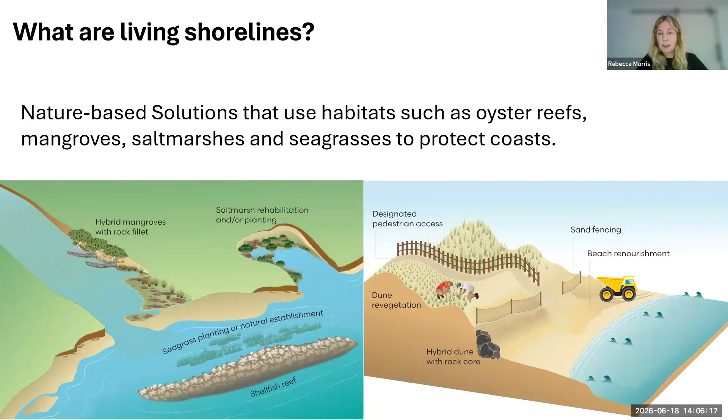So I guess to date, nature-based solutions for coastal resilience have been used more outside of ports, and they're often called living shorelines. Living shorelines are nature-based solutions that use or restore habitats such as oyster or coral reefs, mangroves, salt marshes, seagrasses, beaches, and dunes to protect our shorelines.

And living shorelines are nature-led approaches. So they can be soft, and this is when you just restore the habitat by itself, or they can be hybrid, where there is some engineered component, but the point of these structures is to support the establishment of the ecosystem or enhance resilience. So importantly, the structures become less important over time in providing the functions, and the shoreline protection comes from those natural ecosystems that grow and develop and become self-sustaining.

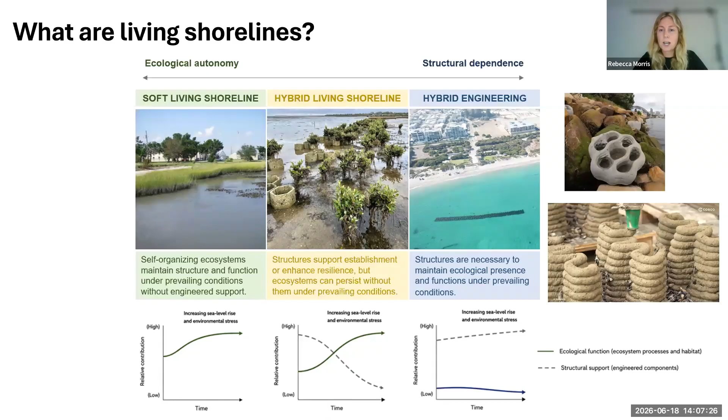Another type of engineering is hybrid engineering, where you may integrate some of these ecosystems, but these are more structure-led approaches. So the structure often has to remain in place as the primary protection part. And of course, beyond this, we can also look at ecological enhancement of traditional infrastructure, which I have worked on in the past, but I'm not going to focus on today.

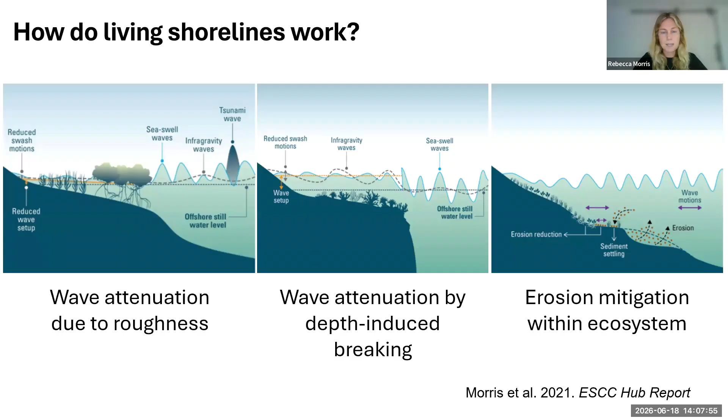So how do living shorelines work? They introduce this large-scale roughness into our coastal zone, which attenuates wave energy through drag. It also decreases the depth, so you get wave attenuation through breaking, and due to reduction in hydrodynamic energy, you get sediment accumulation, but also some of these habitats have these lovely, complex root systems that stabilize sediment.

And why would we want to use living shorelines? Not only are they great shoreline protectors, but they also provide a number of co-benefits like food and shelter to increase biodiversity and fisheries productivity. They can filter water, so improve water quality. We have our blue carbon ecosystems there, like mangroves, salt marshes, seagrasses.

And they're also adaptive to changes in climate. So oyster reefs can accrete at the rate of sea level rise. Mangroves have been shown to be able to do the same. But despite the benefits of these nature-based solutions, they're not really used as standard practice everywhere.

And through our engagement with our practitioners in Australia, one of the reasons for this is just a technical understanding: what living shorelines can we use, where, when. And so in response to that, we wrote these guidelines. Within these Australian guidelines for nature-based methods, there are some chapters that are quite Australia-specific, like the policy landscape.

But there's also a chapter on every single ecosystem that would be relevant beyond the Australian context, and it details the physical and ecological considerations for using these nature-based solutions and for optimizing the ecological and engineering outcomes of living shorelines, but also other things that you need to consider: navigation, safety, approvals, governance, and other socio-cultural values at the site as well.

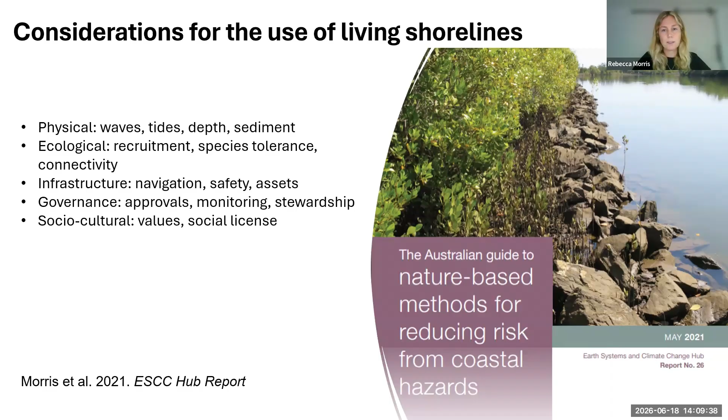And to finish, in the second half of my presentation, I just wanted to give some examples that I've worked on that might be relevant to the port environment. This photo here is from eroding estuaries in New South Wales in Australia. The traditional approach to protecting these eroding estuarine shorelines would be a sloped rock revetment that goes all the way up the estuary bank, and that would then take up the habitat for mangroves, so mangroves couldn't live on a revetted shoreline.

But instead, this approach is called rock fillets, and it's really similar to rock sills in the United States, where you place a rock structure on a shallow bank platform, leaving some space for mangroves to establish behind these structures. And then the mangroves provide increased coastal protection through time.

And so in systems where you have good recruitment of mangroves, like in the New South Wales estuaries, there are a number of mangrove forests there. On eroding shorelines, you get mangroves recruiting, but because the mangroves can't grow their roots fast enough to maintain themselves, they don't survive past a few months.

But once you put in these rock fillet structures, you can see they start to stabilize the bank. You get sediment accumulation, and then you get this recruitment of mangroves behind them. And our research showed that within 10 to 15 years, you get above-ground biomass in these hybrid structures that matches natural fringing mangrove forests.

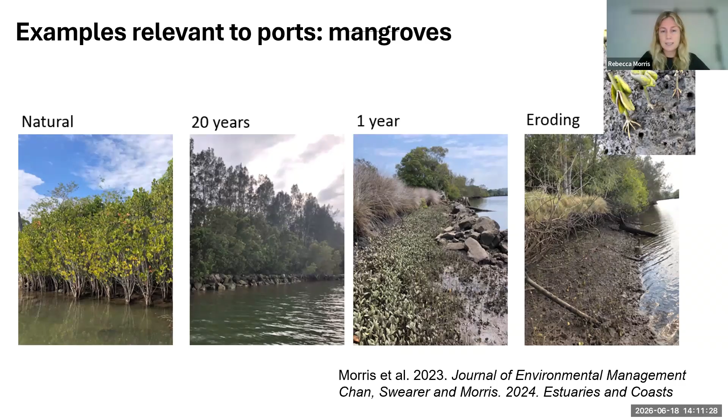So the second example that I wanted to talk about are these reef-based infrastructure for reef building species like oysters, or you could also think of corals as well. And so this picture here was actually developed with the Department of Defense in the United States. And so this is at an Air Force base in Florida. And this particular reef was specifically designed for oysters.

And you can see, offshore we have these kind of oyster reef patch structures, and then inshore these kind of U-shaped structures are actually to support the development of seagrass, and then the ones even further in the intertidal salt marsh. And so this is to develop a living shoreline mosaic, because we know that when you get multiple habitats together, you have a more resilient coastline.

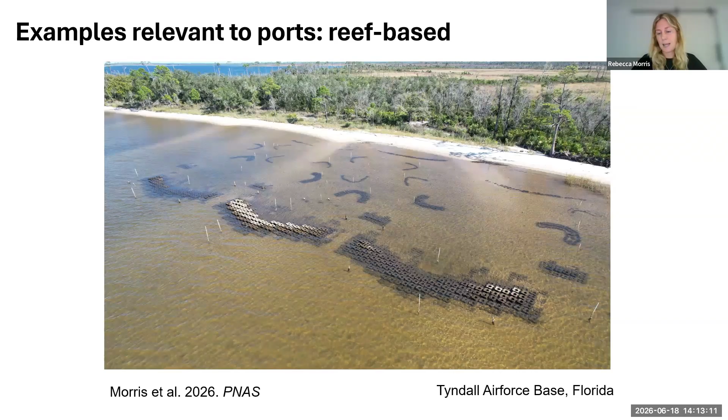It's more effective for coastal protection, because even when water levels are elevated during a storm, the salt marsh can do more of the work, whereas if the water levels are lower, then the oyster reef might do more of the wave breaking. And also for biodiversity, some organisms need salt marsh and reefs at different stages of their life. And so you need these complex mosaic habitats to increase biodiversity as well.

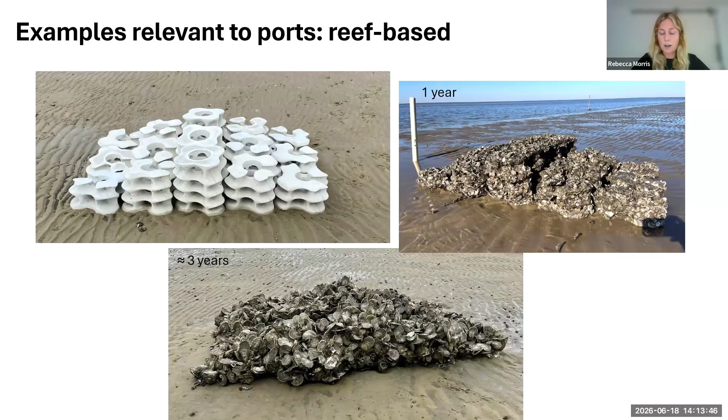And so this particular module has lots of surface area for oysters to develop on. When it's not colonized by oysters, it increases drag as the water passes through the holes. But once the oysters colonize it, obviously you lose that porosity, but it becomes a more rough surface. And so the wave breaking is actually more energetic over these structures. And so you actually get better wave attenuation on lower water levels when you have these oysters colonizing the structure.

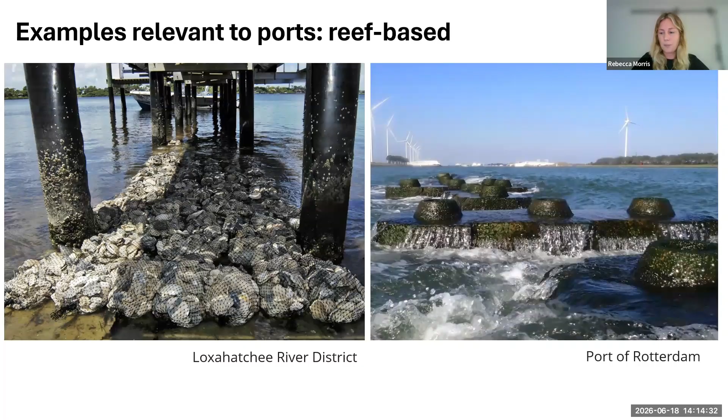And I couldn't find any examples of oysters directly in ports, but you can see how you might be able to, for example, integrate modules into the toe of breakwater structures, or in front of breakwaters, or around other infrastructure in ports. That would potentially, I guess, increase the coastal protection of those structures, or reduce the maintenance of those structures. So I think there's probably a few different ways that reefs might be applicable in some areas where you have these reef building species.

So to finish off, really, it's just to leave you with what a future port shoreline could look like. And it's really about designing ports using a spectrum of approaches. So obviously we're still going to have hard infrastructure in ports, and these could maybe be ecologically enhanced, but potentially we can have this spectrum of approaches as we move out from the hard infrastructure, and coupling, say, reefs with infrastructure, where nature really becomes part of the system, not just an add-on at the end.

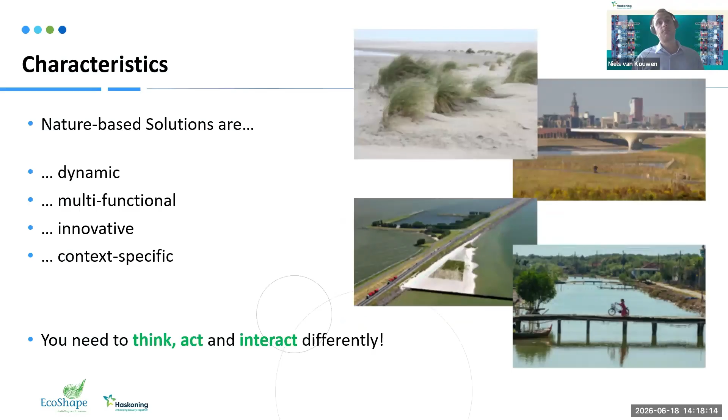So, for example, that has been done already quite a bit in coastal protection, but also, for example, in urban environments. A lot has been experimented with it. But in port environments, that turns out to be still quite difficult. So that's something we wanted to focus on. And it really requires a different way of thinking. And that's what we at EcoShape really want to do.

So EcoShape is a consortium of mainly Netherlands-based companies, such as contractors, consultants, working all over the world, specializing in hydraulic engineering. And we partnered up together with the World Bank to create this guideline. I'll really go quickly through the slides, but I believe they're shared afterwards, so there's more information in there. And you can also always look at the guideline online if you're interested in more information.

So, as I said, ports really have a massive impact on the environment. And it could be the natural environment, so they do have an impact on how nature develops, but also they change how natural processes behave around the port. But they also have an impact on the social environment, which is both positive and negative. They create a lot of jobs, of course, but there are also conflicts with the city and coastal squeeze sometimes. The other way around, that's of course also true.

So natural processes also require constant maintenance within the port and a lot of additional infrastructure, but also climate change really requires us to rethink port infrastructure. And then again, we have a lot of social elements that really also have a massive impact on how a port performs. And we call this the license to operate. And that's one of the important motivations for ports to really consider looking further into nature-based solutions.

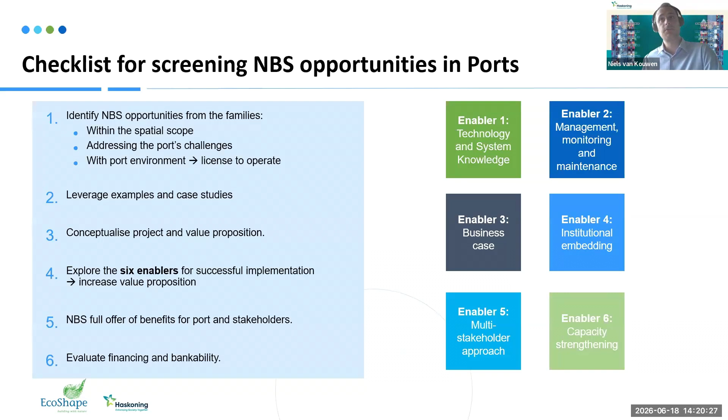So what we did with the World Bank is to look at a checklist that you can do when you're considering a port infrastructure development. And by going through this checklist, you can evaluate if there are really opportunities to embed nature-based solutions within your planned improvements. And rather than going through it, I would like to go through it through a hypothetical case, let's say in Southeast Asia. So I have this really hypothetical port and this hypothetical terminal.

And I'm really concerned about this terminal because of climate change. I see risks related to sea level rise and increased storm intensity. And what are those risks? Well, first of all, there can be wave overtopping, which will increase the downtime at my terminal, but I also foresee more wave penetration at my berth, which lowers, of course, the productivity of my quay and my cranes. Some other things I have to consider is that I have a limited budget, but I'm also working on really weak, muddy soils here, and I have also other stakeholders which have activities in this area.

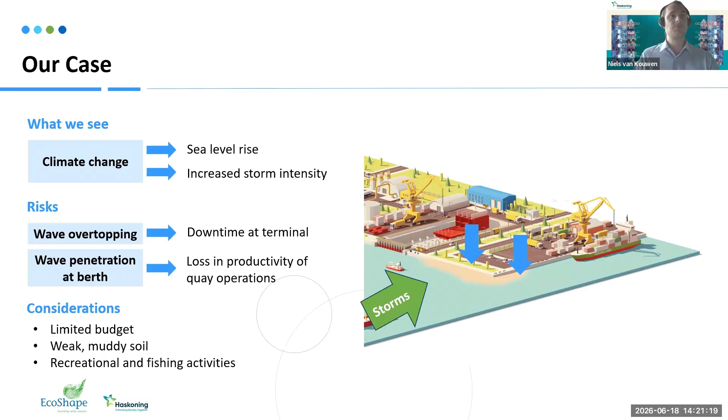So the first step in our checklist is really to evaluate what challenges I need to address. And these challenges can be a really wide range where nature-based solutions could help you. So they could be, for example, related to development and expansion. So looking at, for example, CAPEX or operational expenditures, but also looking at permitting or making more use of available space. It can be climate risk related. So think, for example, of storms, typhoons, flooding, sea level rise, etc.

But a large element is also performance and efficiency related. The performance of ports is really related to, for example, wave penetration and wave-related downtime, but also navigation performance. Then we have a category which is related to how you maintain your infrastructure, and it can be both soft infrastructure and hard infrastructure. And the last category is really related to that license to operate. How do we deal with the social environment as well, and how do we incorporate them in how we operate as a port? Well, for our case, it's mainly related to climate risks, but also downtime-related risk, wave-induced downtime.

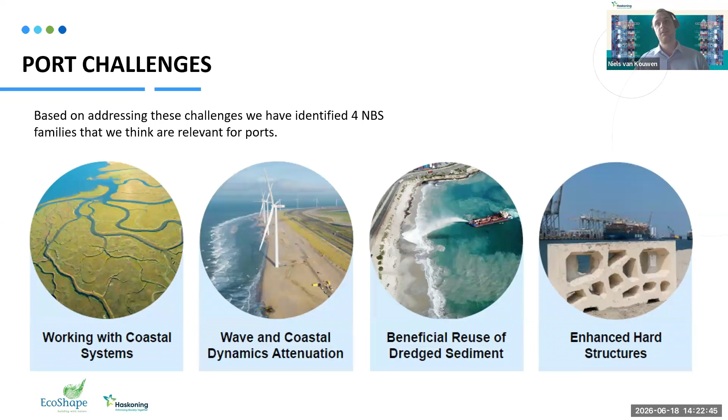If we have identified the challenges that we would like to address, we can consider 4 families. We have divided port-related nature-based solutions into 4 families. The first family is working with coastal systems, so that really relates to what opportunities reside in working with the natural processes around my port. And these nature-based solutions really focus on a system level.

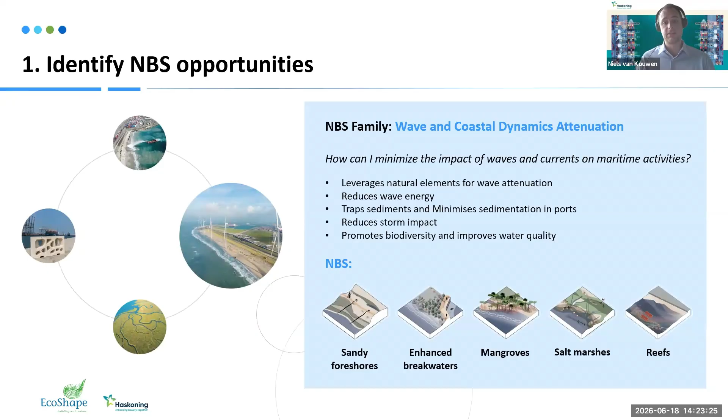Then we have what Rebecca already mentioned, the wave and coastal dynamics attenuation family. So that really relates to how can I minimize the impact of waves and currents on my maritime activities. And there are many ecosystems that are really well placed to do this. Then the family beneficial reuse of dredged sediment. Many ports have necessary dredging activities they have to do. And this family really relates to, okay, what other opportunities do I see to make better use of my dredging activities?

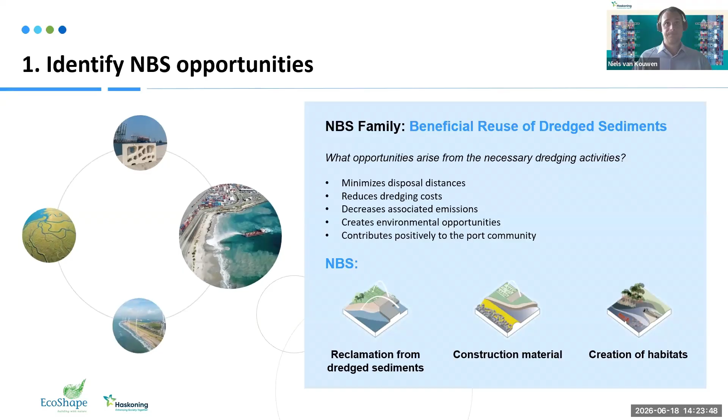And the final family is related to enhancing hard structures. So that's mainly related to how can I make my hard infrastructure, my quay walls, my breakwaters more environmentally friendly. So there could be, for example, panels or elements connected or embedded within quay walls or revetments or breakwaters. They can be connected to piled structures, for example.

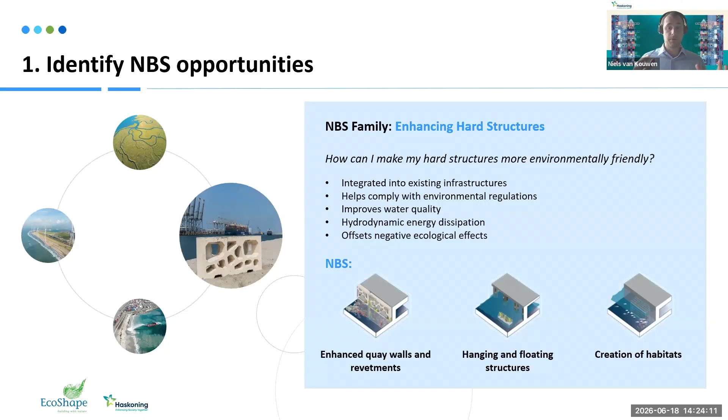Well, if we look at that case I highlighted, then the waves and coastal dynamics attenuation seems really suitable, right? Because it performs relatively well on minimizing wave-induced downtime. It also mitigates storm damage, and some ecosystems can also grow with sea level rise, so there might also be something there.

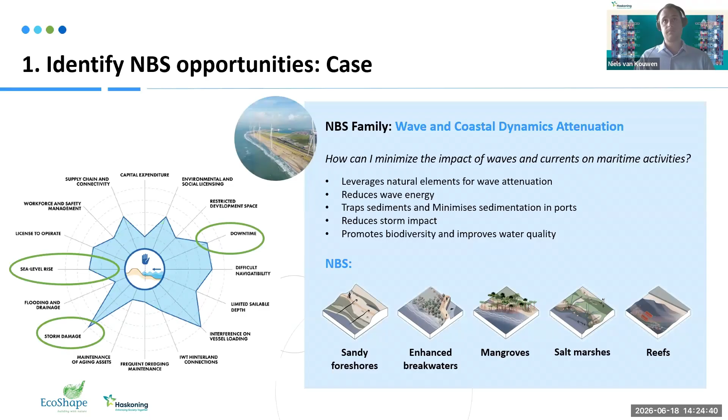The next step is really looking at, okay, what other case studies can I find across the world that really relate to my case, and what can I learn from that? So, for example, in a Southeast Asia environment, we can look at reefs and mangroves. And I have this example of reefs in Rotterdam, but there's also this example of a mangrove breakwater in Jakarta. And that seems really interesting because it's really a similar case to my hypothetical case, luckily.

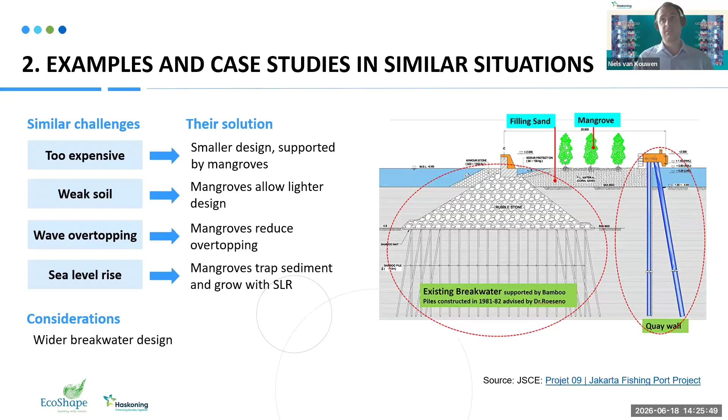So what happened here is a small breakwater needed to be constructed, but it was quite difficult due to the weak soil conditions. So what they did is they reduced the overtopping criterion of the breakwater by using a strip of mangroves to mitigate that wave overtopping. And because of that, the breakwater could be smaller, you need less foundations, and it really resulted in a less expensive breakwater.

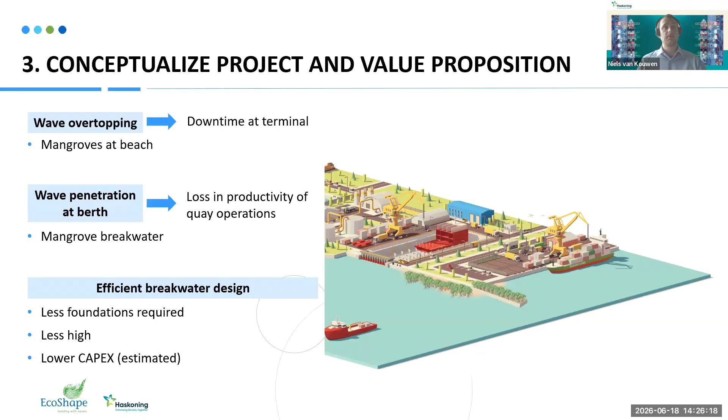So I've chosen to do something similar here, a stretch of mangroves in front of my terminal to reduce wave overtopping and downtime of my terminal itself, and also this mangrove breakwater to reduce wave penetration. And I think because of this, the capital expenditures are also a little bit more limited because I don't need to build a full-fledged breakwater, but I can make it a little bit smaller.

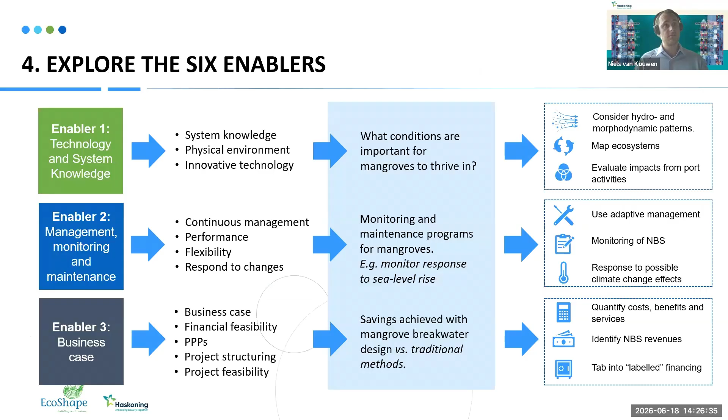The next step is to go through the 6 enablers, which are related to system knowledge. So how am I embedding this in the system? How do I maintain and monitor it during the lifetime? How can I make a good business case out of it? How can I embed it into policy and governance? How can I incorporate more stakeholders? And also, how can I strengthen the capacity? So the support from local communities up to board level.

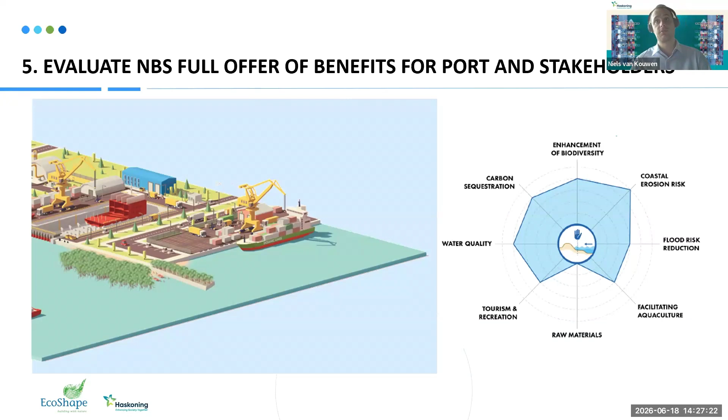And by doing this, you probably need to fine-tune the concept, for example, making the mangroves wider, incorporating more functionalities for other stakeholders. And when you've done this, you can evaluate the full range of benefits, not only for the port, but for a wider range, also looking at biodiversity, carbon sequestration, etc. And when you've done this, it's easier to evaluate a full business case and see if it's feasible. So really at a high level, I think that was what I wanted to show.

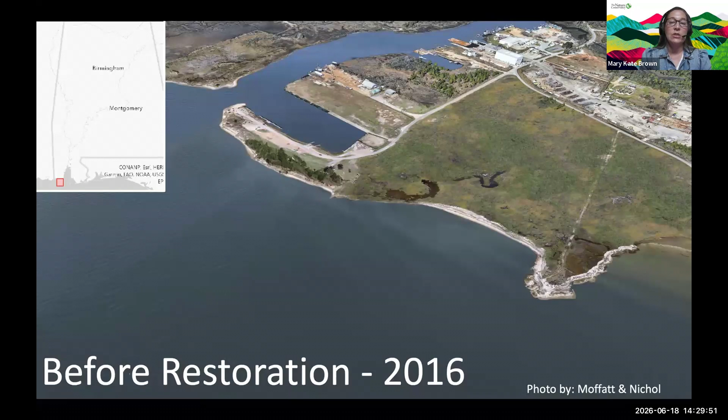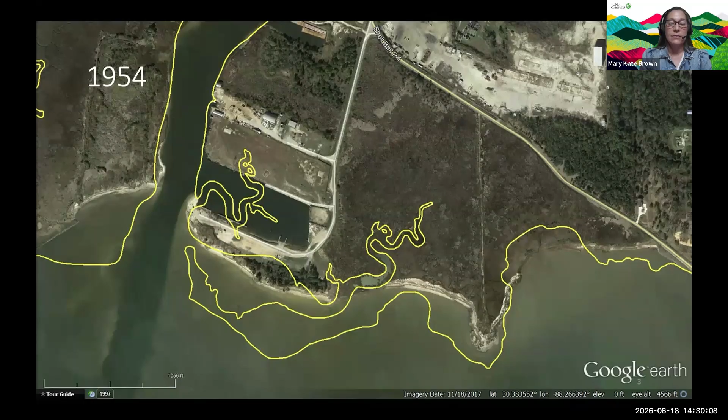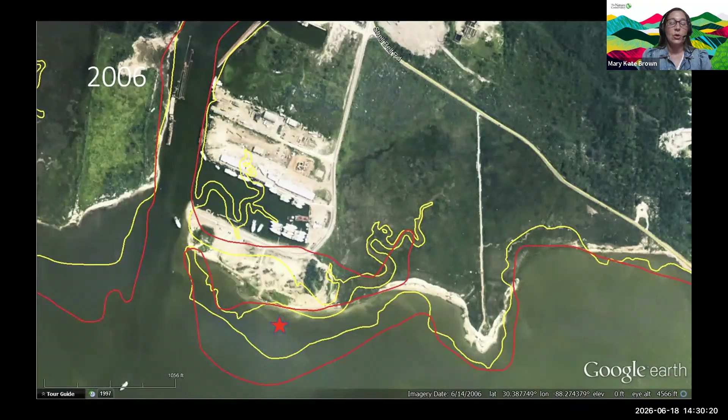If you see the next slide, it will show you the shoreline erosion since 1954, with the red line showing how the shoreline was before. Over the years, the shoreline slowly eroded. In 1997, you will see that they actually built out Lightning Point where the red star is. Then over the next 30 years, the shoreline eroded another almost 200 feet. So this really called for action, that we need to incorporate some nature-based solution.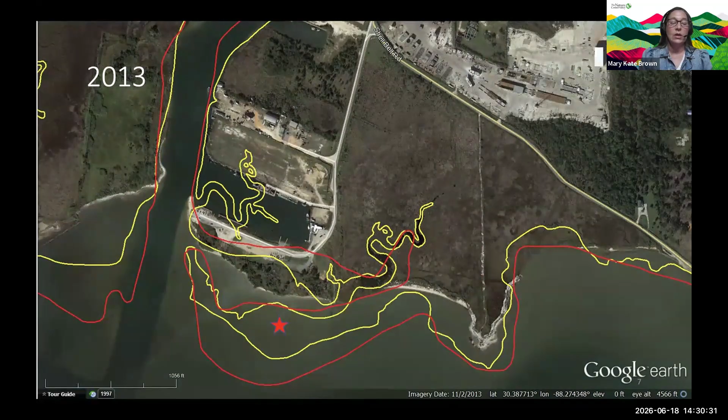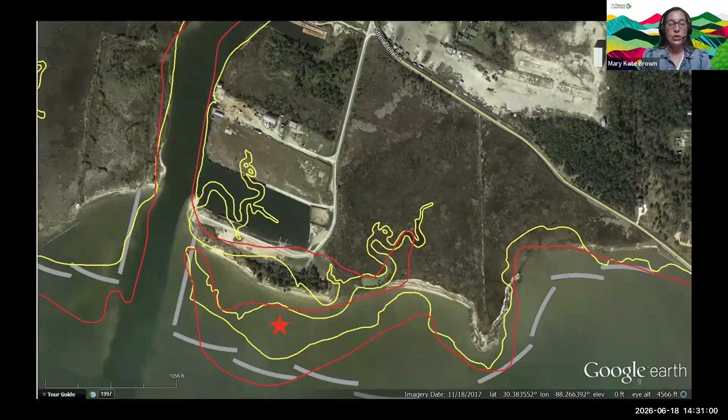So we hired Moffatt and Nichol to come up with a solution with breakwaters, which is the next slide. In 2017, we hired an engineering firm to think about how do we protect this small port but also keep an active federal navigation channel, which you can see in the dark area. They did not previously have jetties in that area, so we were encouraging the Army Corps of Engineers to allow a project with jetties, a type of hard infrastructure, but also mixed with nature-based elements, coastal marsh and beneficial use of dredged material.

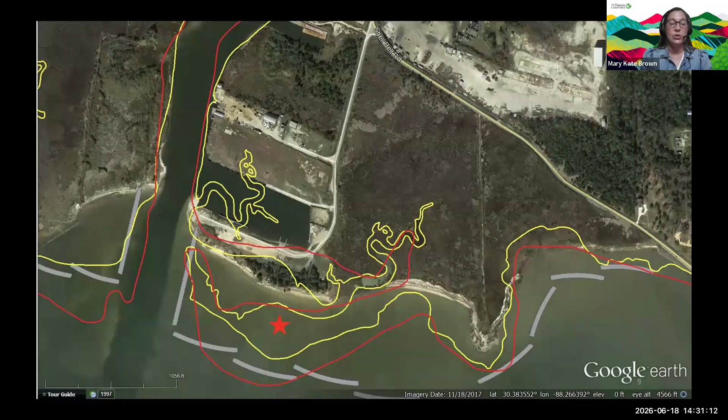So we moved forward with this project with five different components. This is a rendering that Moffatt and Nichol did of what the project would look like 5 years from now. In this rendering, we have shoreline protection, which is 1.5 miles of rock breakwaters. Number 2 is habitat creation, created using the dredged material. We created over 40 acres of coastal marsh, scrub, and tidal creek.

We also wanted to enhance the public access. Really, this is the gateway to the bayou. This is where a lot of people come down to fish, not just to take the boat out, but actually fish for food. And the last, 4 and 5, are really focused on the beneficial use of dredged material: using locally sourced sediment, protecting the active navigation channel, and using the sediment to protect the shoreline of Bayou La Batre. Next slide, please.

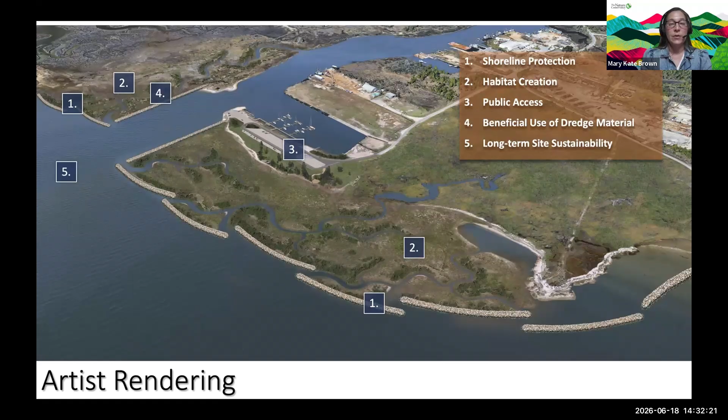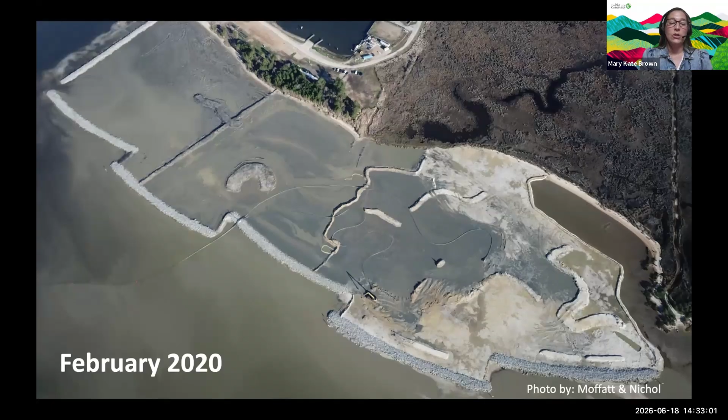After design and getting approval from the state and federal agencies, we were able to start construction in October 2019. A lot of times the public doesn't get to see projects under construction. It's a lot of dirty work, but we worked with some really great contractors who understood the purpose and application of dredged material, working simultaneously with building the breakwater. Over the next couple of slides, you'll see how we went from dredging the material to building marsh habitat behind the hard infrastructure.

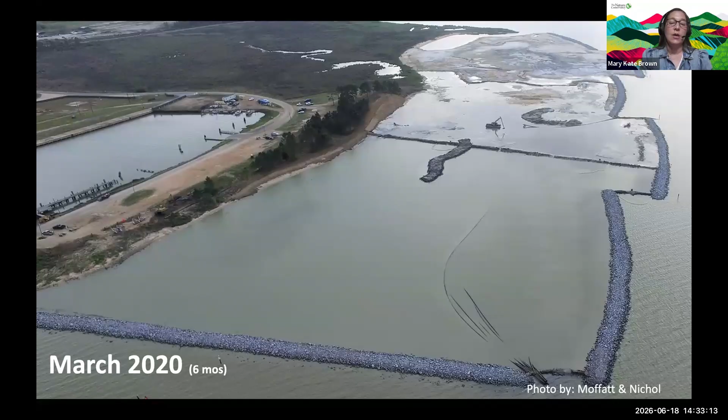We finished in June 2020, and right when we were finishing, the project looked great. We planted. Then we hit a season of storms. Next slide, please. We had 4 named storms in 2020, just when we finished the project. This is very similar to the typhoons Southeast Asia experiences.

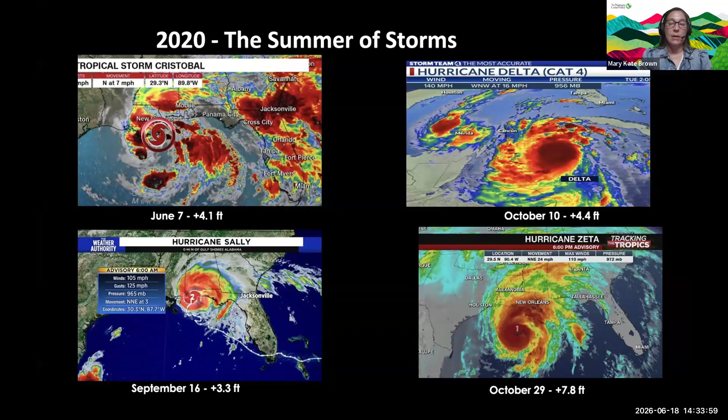And we had a very active season with 4 storms. And the biggest storm, we received almost 8 feet of storm surge, which is significant. But we knew that our project was able to succeed because there was limited damage on the overall project site. So the next year we waited.

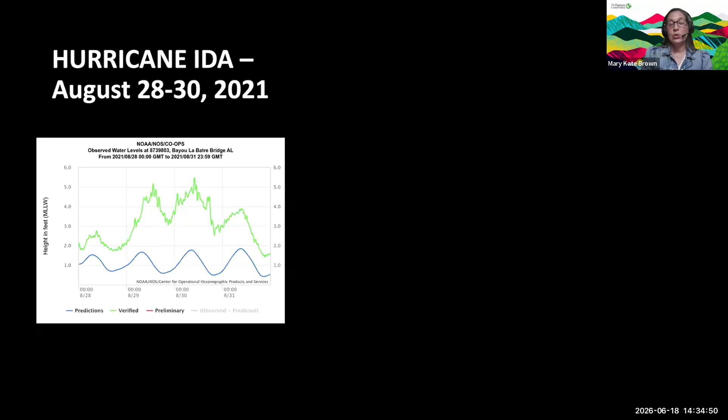After 2021, we did experience another storm called Hurricane Ida, and she brought in 2 storm surge events that you can see, the 2 peaks in the tidal water level. This is actually from a wildlife game camera that I posted on a tree to actually show how the project works through storm events. So the first picture, this was right before the storm made landfall.

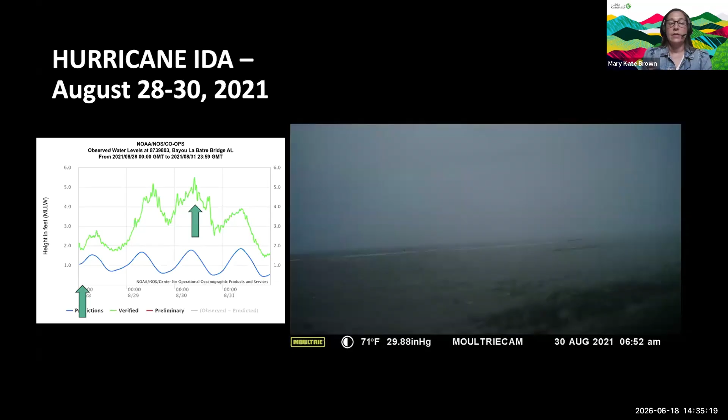The next slide is actually when we have the storm surge, water overtopping the living shoreline structure, the whole complex of Lightning Point. And then the last slide is basically at the end when the storm and the water levels recede. As you can see, it looks pretty much the same as it was in the beginning. And this is really proof of concept that these nature-based solutions really do add value and provide a significant benefit to protecting the ports, especially small ports.

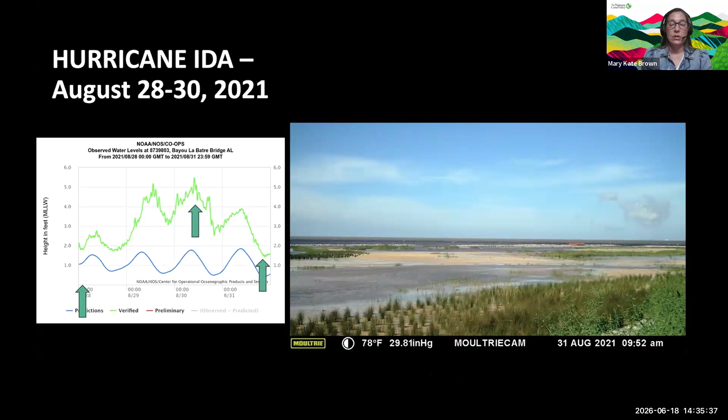Next slide, please. These are some of the benefits that we were able to calculate from the project. You've already heard most of this mentioned by our speakers so far, but we have reached beyond just protecting the shoreline and reducing the coastal erosion. We actually were able to bring in the wildlife aspect with respect to the bird species. We used over 240,000 cubic yards of local sediment to build the site. And we created an additional 2.5 miles of tidal creeks and more.

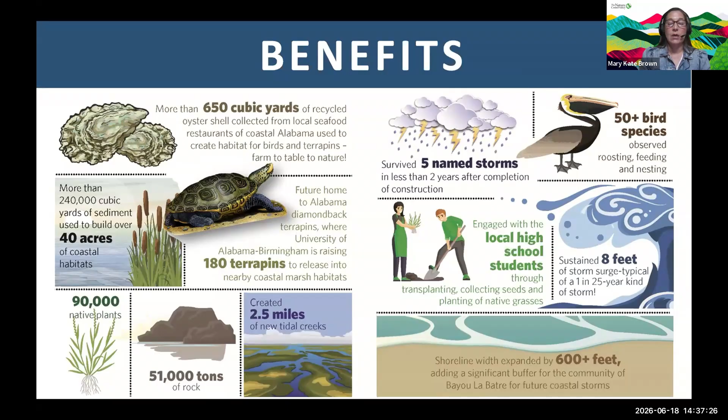Next slide, please. And for example, they are currently building a redevelopment project, which is worth $28 million. This project would not have been possible if we did not build the nature-based solution at Lightning Point.

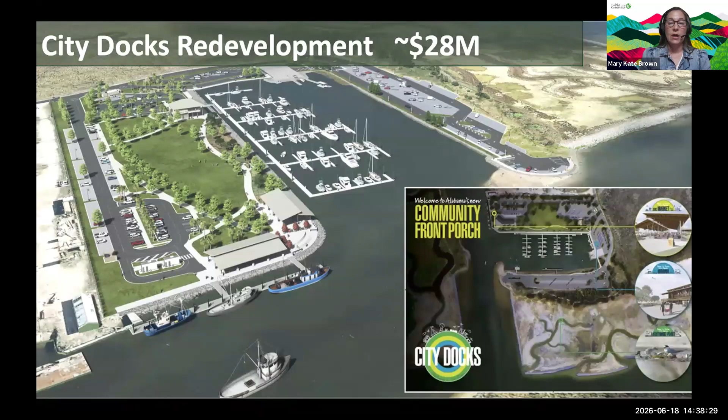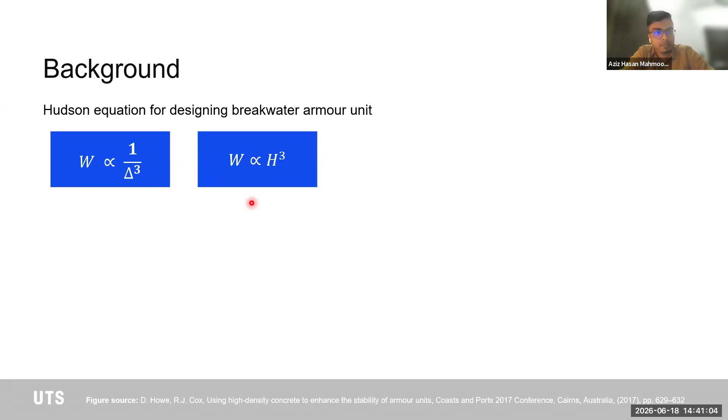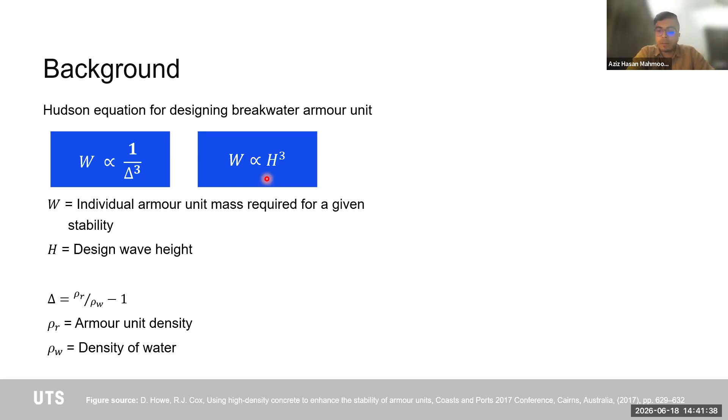So to give you a bit of background of the project, this was based on the Hudson equation, which typically correlates the individual armor unit, the armor units that we have on top of breakwater structures, as an inverse cubic relation to the armor density, and also a cubic function of the wave height. Now, with increasing sea level rise, particularly during strong storm events, we have greater wave energy, and it does pose threats to existing breakwater infrastructures that we have along the shores.

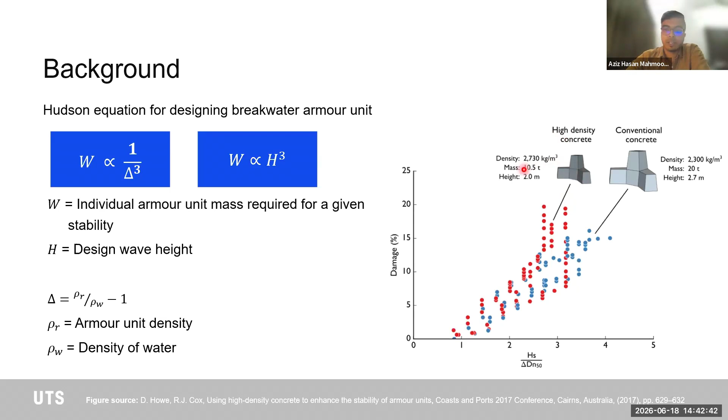Now, for this particular case study, there are a number of industry partners and also government agencies involved, where we've taken the northern breakwater at NSW Ports' Port Kembla Harbour, and they wanted to retrofit this particular breakwater with high density concrete armor units.

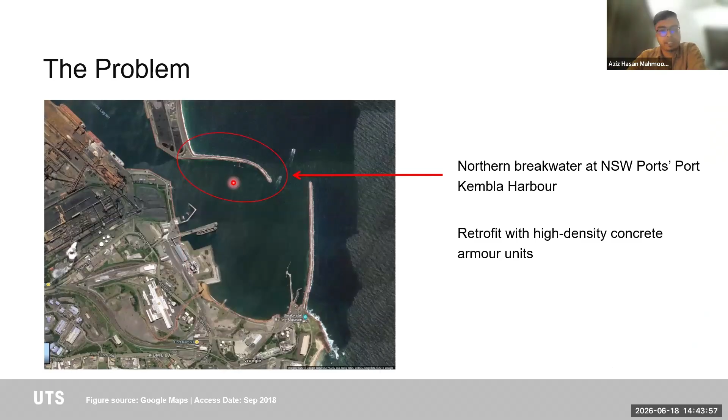Now, in order to increase the density of your concrete, the most appropriate way would be to substitute your coarse and fine aggregates, that is your stones and your sands, with materials that have a high density. Steel furnace slag, which is a byproduct of steel making, we've chosen as the material for making our concrete. And if I may go back to the previous slide here, this site is about 2 hours south of Sydney, and about half an hour drive away, we have Australian Steel Mill Services, which produce a lot of steel furnace slag. So this was a locally available material that we could integrate into making the concrete.

Now, steel furnace slag has a 20 to 25% higher density than typical naturally available stones. Australia also generates about 3 million tons of various metallurgical slags as an industrial byproduct. So in the concrete, we're trying to incorporate something that we usually perceive as a waste and convert that into a value-added product. But this particular aggregate comes with a challenge.

It has free lime, which causes the aggregate to expand when we use it as an aggregate in hardened concrete, and that free lime reacts with water in the concrete, and it causes delayed hydration and forms calcium hydroxide, which is a chemically active material, and it also expands with time.

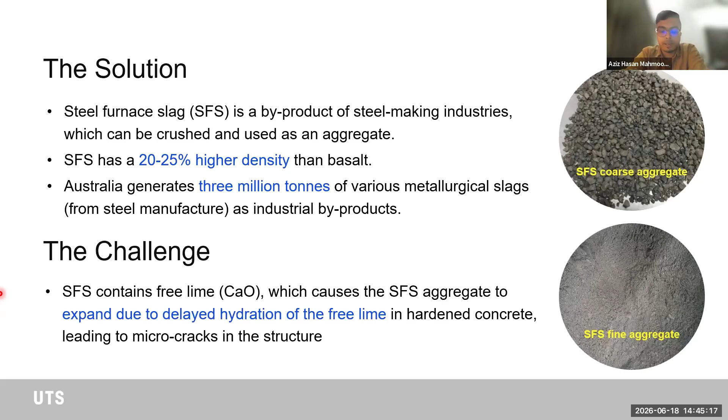So with any kind of expansion within your concrete matrix, it does pose a level of stress that can introduce some cracks within your concrete, and also deleterious chlorides and sulfates and carbon dioxide can impregnate your concrete and really hamper the quality of the concrete.

So as a solution, we came up with the idea to use steel furnace slag in a low calcium binder. Now, with your typical cement that you get out of cement manufacturers, the calcium oxide content is quite high. It ranges from 60 to 65% if you run a chemical composition of the cement. But we can use geopolymer concrete, which doesn't involve any cement at all as the binder.

So we picked fly ash and ground granulated blast furnace slag, which are industrial byproducts as well. Fly ash comes from coal-powered power plants, and slag comes from steel industries as byproducts. The good thing about these products is that they are very amorphous in structure, so you can activate them using some sort of alkali. So we have chosen sodium hydroxide and sodium silicate to activate.

But the key point here is now we are trying to design a concrete which doesn't use any cement, doesn't use any natural sand, doesn't use any natural aggregate or stone. So every component of the concrete comes from industrial byproducts. The only chemical that we used is the activator. Now, this was chosen to allow for the diffusion of free lime into the low calcium matrix due to the high differential in calcium content between the aggregate and the geopolymer paste that we have here.

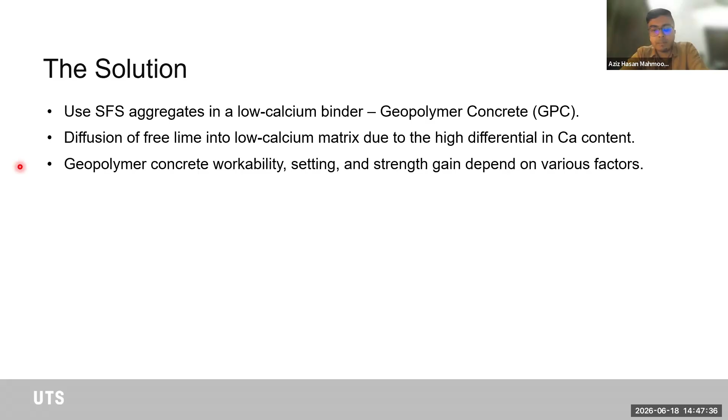The other challenging aspect of geopolymer concrete is the workability. The property can range from very short setting time to very high setting time, depending on how you design the concrete. And the setting time can be a little challenging if you do not have your proportions right. Because this is site application and not within a laboratory environment, on site there's no way to control your environment, and the strength gain was a critical factor in designing the concrete mix. So we were trying to achieve sufficient strength in ambient curing conditions, and we were targeting some markers for the quality of concrete.

So we were targeting high density because of what came out of UNSW Water Research Lab, where they have demonstrated that even a little bit of increase in your density can result in a very stable breakwater unit formation. Now, the other aspects were material based. So we were trying to have sufficient workability, a slump of over 120 millimeters. If anyone within the audience is from a concrete background, you know that workability is an important aspect of concrete delivery, supply and placement as well.

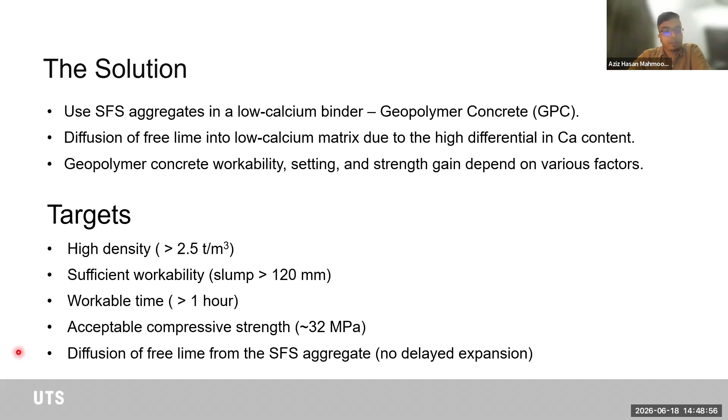We're trying to have a workable time of over 1 hour, taking into consideration the concrete trucks coming from the plant onto the site, and also pouring and compacting the concrete. The compressive strength is not a critical factor here. The most critical factor is the high density, but we're targeting 32 MPa of compressive strength, so we can move the high density armor units from the site onto the breakwater. And also we're targeting the diffusion of free lime from the steel furnace slag aggregate into the concrete mix.

So the process involves the typical stages of any next generation or new type of concrete supply. The lab trials were undertaken at UNSW as part of the project, and we did a trial with a volumetric concrete mixer at Bargo, which didn't go quite so well because these volumetric concrete mixers allow about 10 to 15 seconds of mixing time, and with geopolymer concrete, that's not enough time to mix all the components. Then we went for another trial where we used agitator trucks, and that trial did really well. I'll take you through a bit more information with the trial.

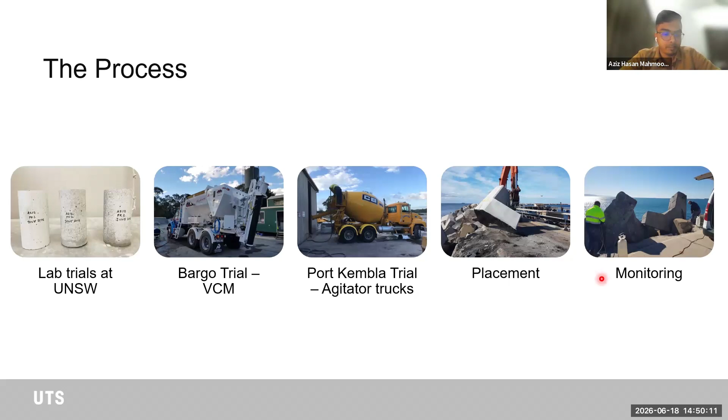After we achieved sufficient strength, we went for the placement of these armor units. So these are geopolymer concrete Hanbar armor units. Now, these units were placed in July 2018. And since then, we've been monitoring the performance of these units, basically the material performance of these concrete units.

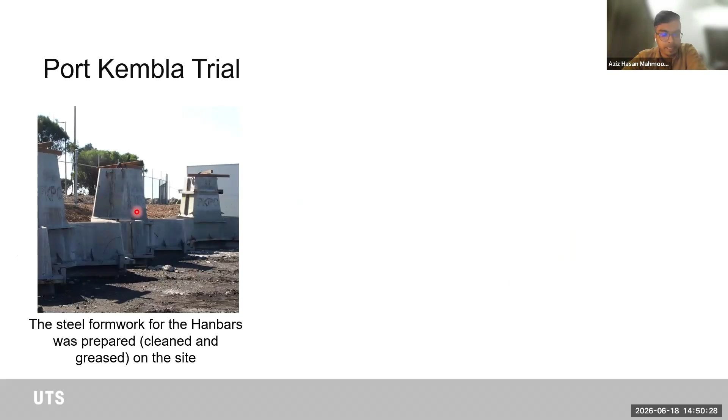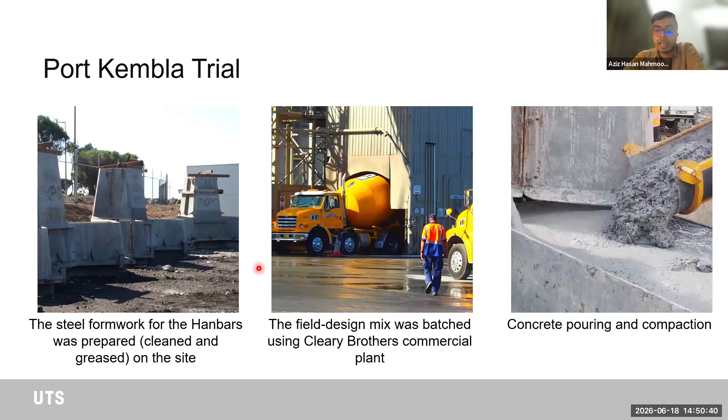So a bit more into the Port Kembla trial, the steel formworks for the Hanbar were prepared. You see each of them is more like a three-legged unit. And we used a field mix design, which was batched using Cleary Brothers commercial plant, which is about 15 minutes away from the site. And we poured the concrete in two segments.

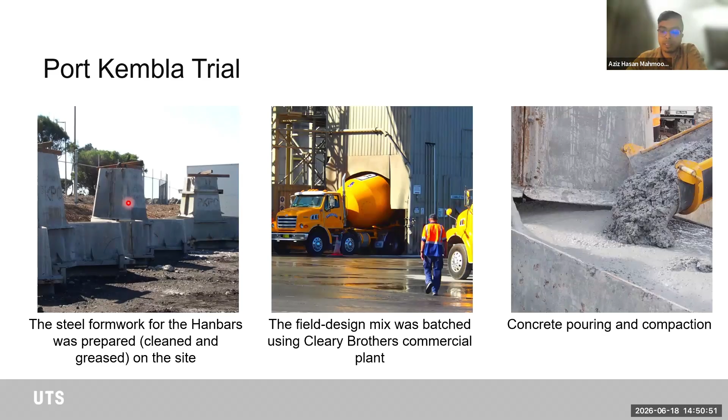So we filled out the legs first and waited for the legs to sort of stiffen up before we poured the rest of the concrete on the top leg there. So here's a picture of concrete pouring on the top of the formwork. And then they were left within the formwork for 12 to 48 hours.

Now, I should give you a reminder that in 2018, these were cast in June and July. So the average temperature ranged from 3 to 10 degrees Celsius. So it's very cold and not an optimal environmental condition for any concrete to reach that level of strength in ambient curing conditions. So when we achieved sufficient strength, these units were placed.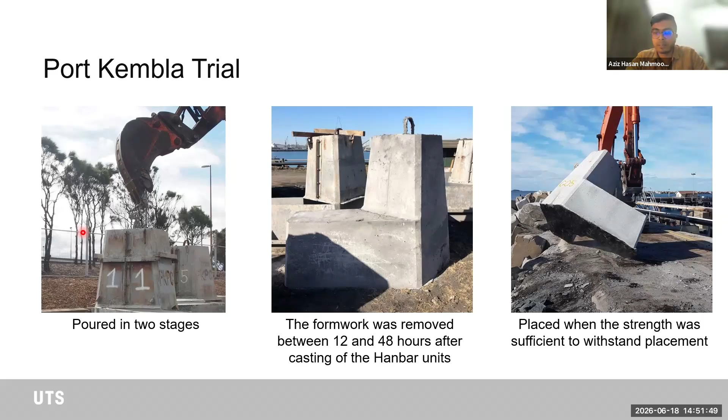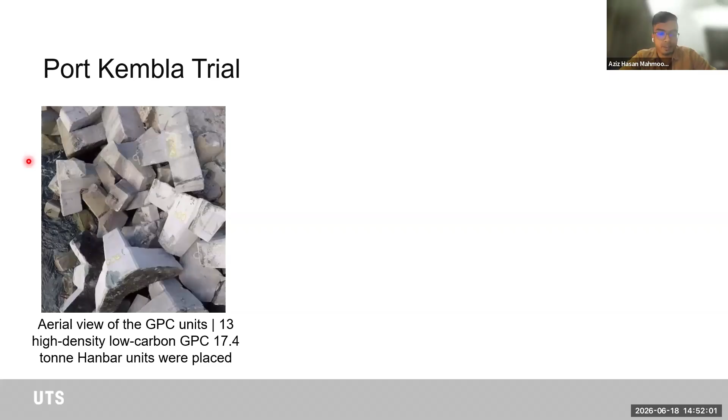What we mean, we collected some samples and took them back to the lab, and we were monitoring the strength development of these concrete cylinders. And when we achieved target strength, we could move around these units and place them onto the breakwater. Here's an aerial view of the geopolymer concrete units. So we made 13 high density, low carbon geopolymer concrete armor units, each with about 17.4 ton in weight.

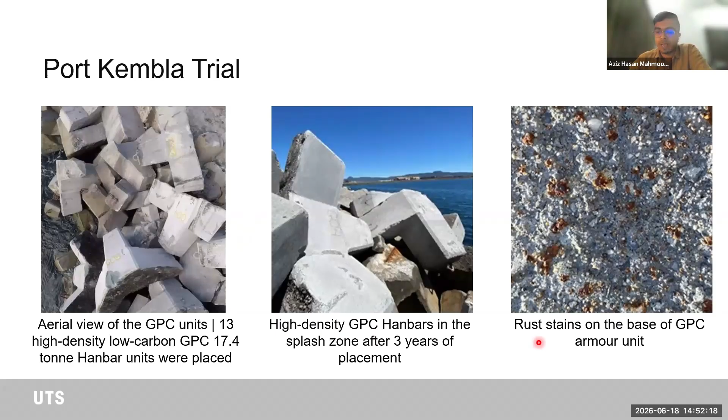So after 3 years, we went back to collect some core samples and to have a visual observation. So the first thing that we noticed was rust stains on the base of the GPC, the geopolymer concrete armor unit. So we took some cores out from the site, and we could see the rust stains on the specimens that were collected from the splash zone of the breakwaters. And after grinding the top bit and the bottom bit, we could notice steel fragments on the exposed specimen surface there.

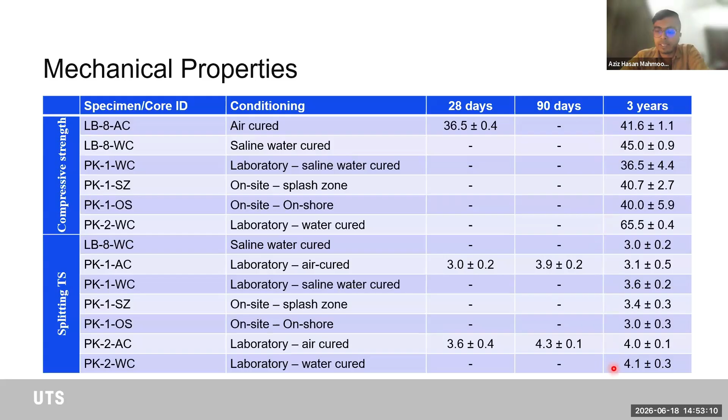And we also ran comprehensive testing. So I'm just demonstrating here the compressive strength and also the splitting tensile strength. So with the target 32 MPa, we could see that even after 3 years, the numbers looked very well, and we could see demonstration of continued geopolymerization and also development of strength of these units over time in the first 3 years.

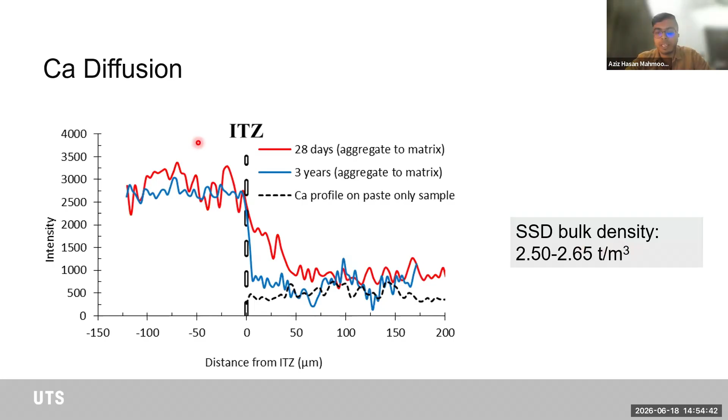The calcium diffusion was there, so there's no risk of delayed expansion from the hydration of free lime. We had sufficient workable time to cast these armor units on site, and also we could leave these armor units on site for ambient curing even in cold winter nights.

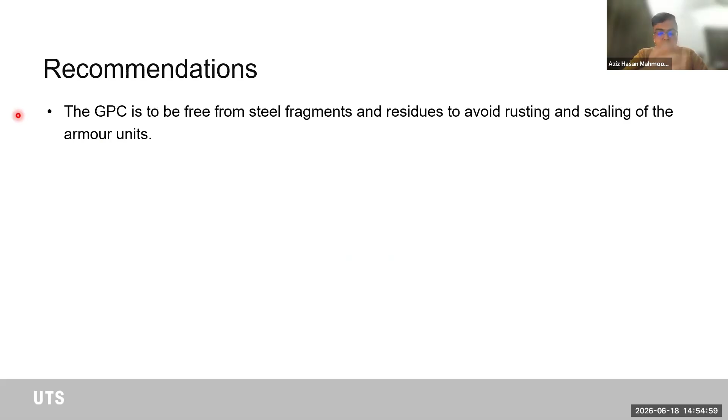But a few recommendations came out of the durability study after 3 years. So we need our geopolymer concrete to be free from steel fragments. The steel fragments come with the aggregates because these are byproducts of steel making industries. The free lime content, we did recommend that it should be within an acceptable limit of 1.6 to 4.4%.

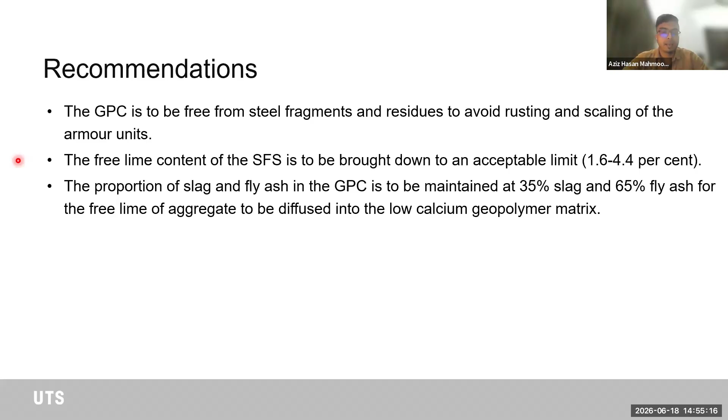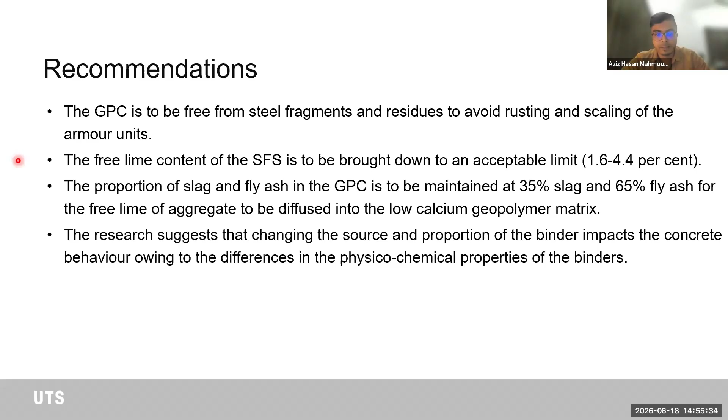The proportion of the slag and fly ash needs to be maintained. So we went for 35% slag and 65% fly ash, and this comes based on 10 different trials, 10 different mix designs of geopolymer concrete mix. And also the research suggests that changing the source and proportion of binder impacts the concrete. So whenever you are doing the next batching of your concrete, you should really undertake the material investigation of the source materials if you go for a different source to make your concrete.